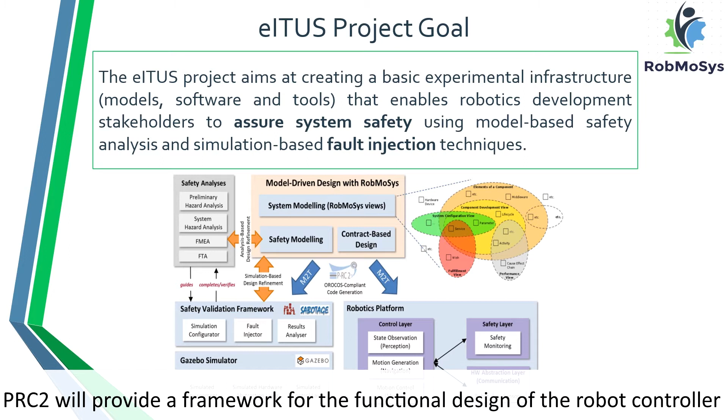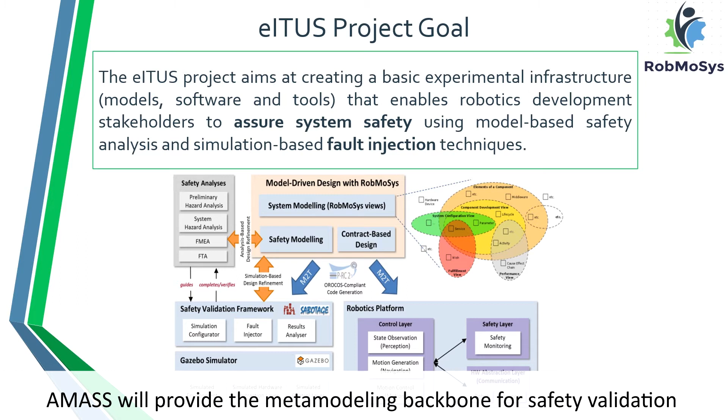PRC2 will provide a framework for the functional design of the robot controller with component development and system configuration views. It will additionally provide tools for code generation from these views. AMASS will provide the meta-modeling backbone for safety validation by providing a safety modeling view for both model-based safety analyses and simulation-based fault injection. Two remarkable challenges exist when developing reusable safe robotics systems and software.

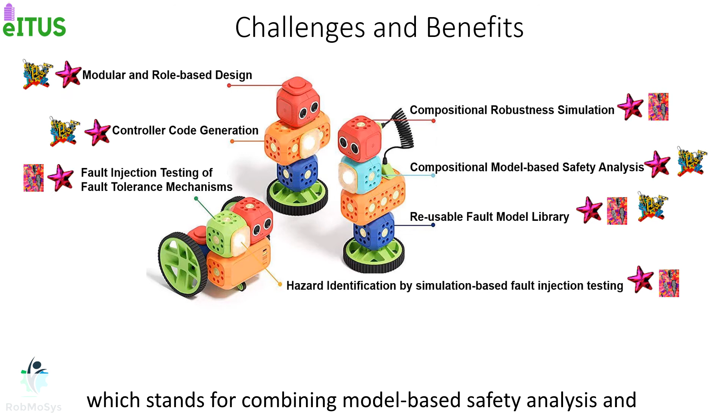First, modular and role-based design needs to be provided. Second, solutions for an early safety assessment are needed, which stands for combining model-based safety analysis and robustness simulation by means of fault injection. Some of the most attractive benefits of applying the eITUS methodology are the development of composable, replaceable and reusable safe components.

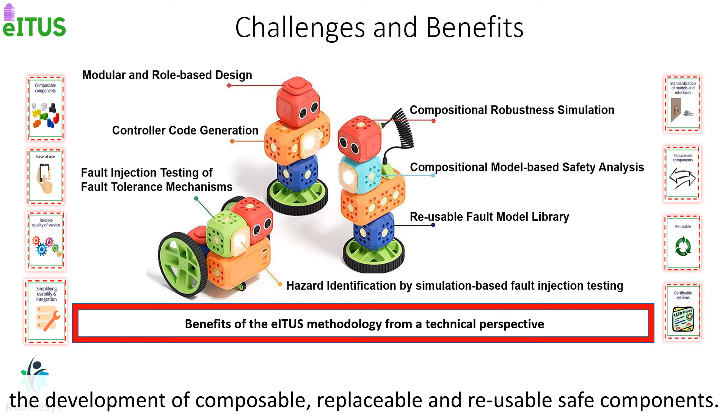Robotics systems face hazards whose sources belong to software, electronic, electric or mechanical parts of the system itself, as well as to human errors, or to an uncertain and stressful environment. Functional safety is the aspect of safety that aims to avoid unacceptable risks due to electric malfunctions. The system should be designed to properly handle likely human errors, hardware and software failures and operational, environmental stress.

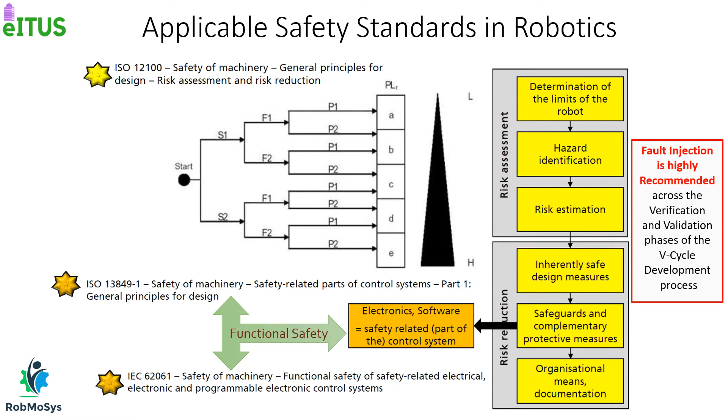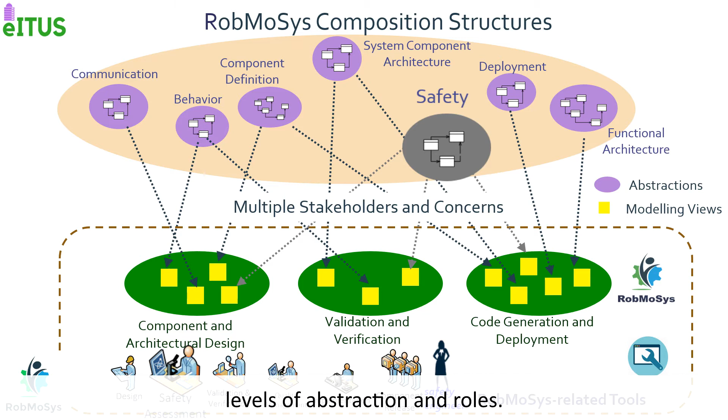The RobMoSys project defines structures which enable the management of the interfaces between different robotics-related domains, levels of abstraction and roles. eITUS will broaden the ecosystem by considering safety aspects such as the development of a safety view and the introduction of a new role called safety engineer.

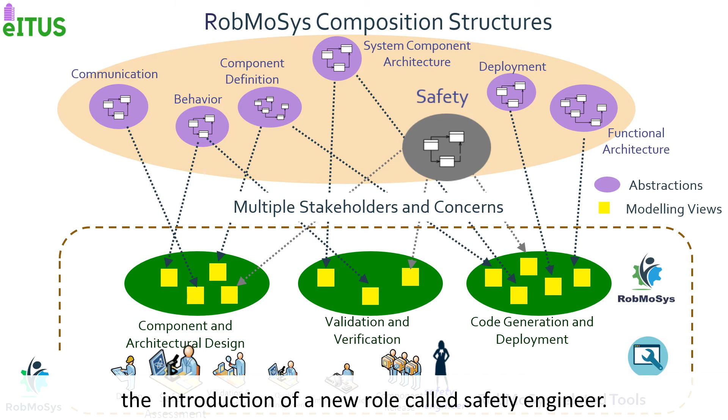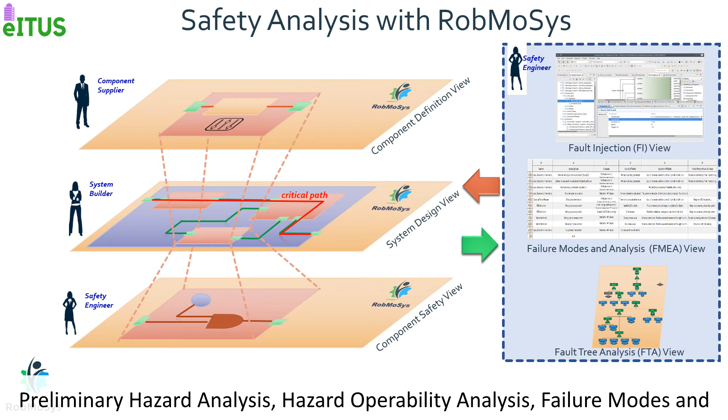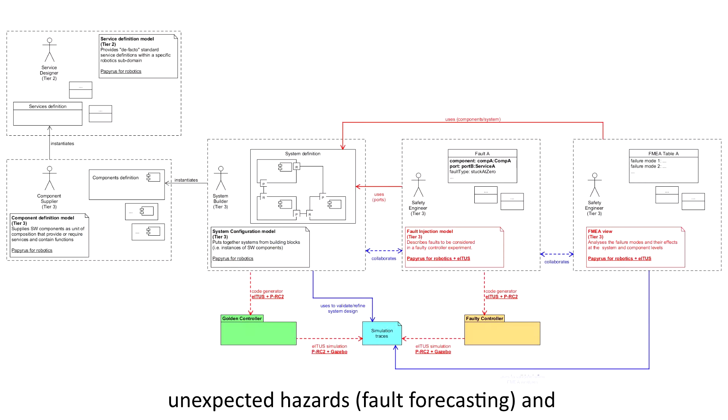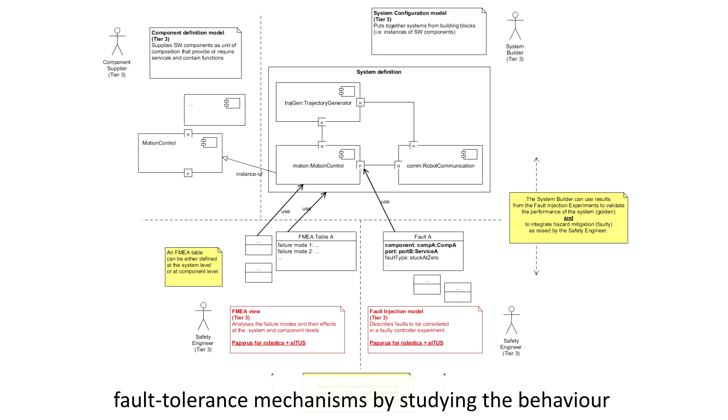The safety analysis and validation steps are fundamental aspects to perform the safety assessment. Some of the commonly used risk assessment methods are preliminary hazard analysis, hazard operability analysis, failure modes and effects analysis and fault tree analysis. Furthermore, fault injection simulations complete these analyses by finding unexpected hazards, fault forecasting, and verifying the implemented safety mechanisms. Fault injection is a common technique for validating the effectiveness of fault tolerance mechanisms by studying the behavior of the system in presence of faults.

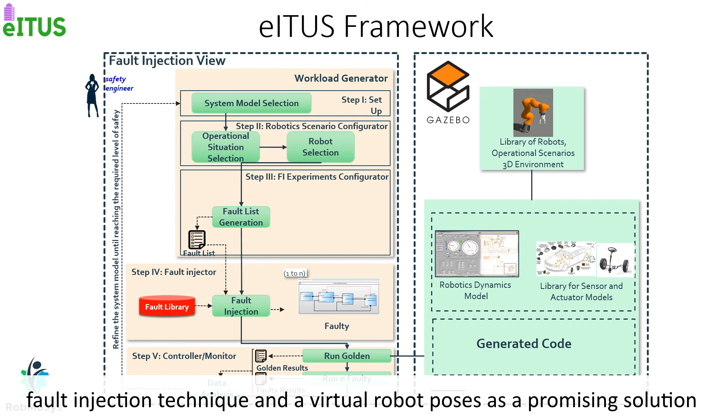The effects of software or hardware faults are emulated by randomly changing code or data at different software locations. The eITUS framework sets up, configures, executes and analyzes the simulation results. Model-based design combined with a simulation-based fault injection technique and a virtual robot poses as a promising solution for an early safety assessment of robotics systems.

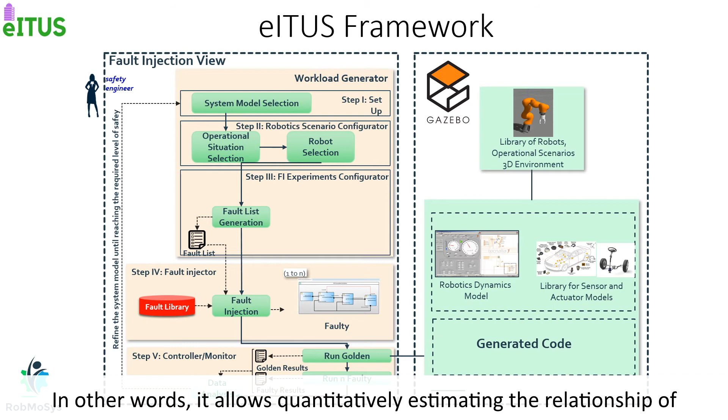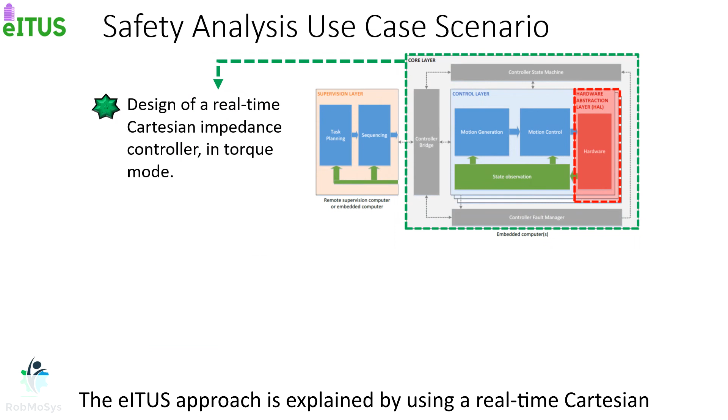The added value of including robots and environment models is that the maximum time before the robot dynamics are unsafely affected can be identified. In other words, it allows quantitatively estimating the relationship of an individual failure to the degree of misbehavior on robot level. The eITUS approach is explained by using a real-time Cartesian impedance control system, in torque mode as a use case scenario. The eITUS overall approach is as follows.

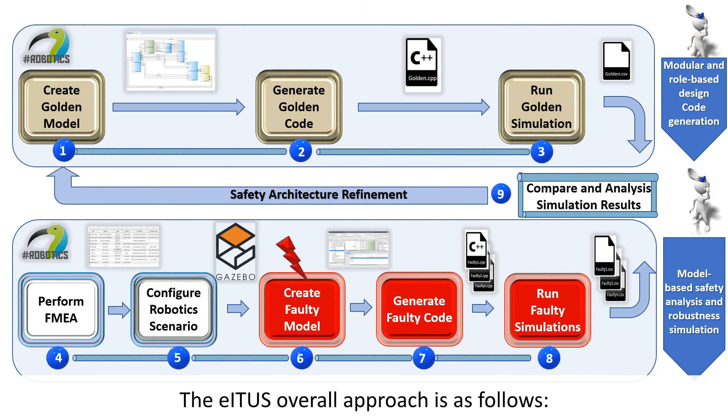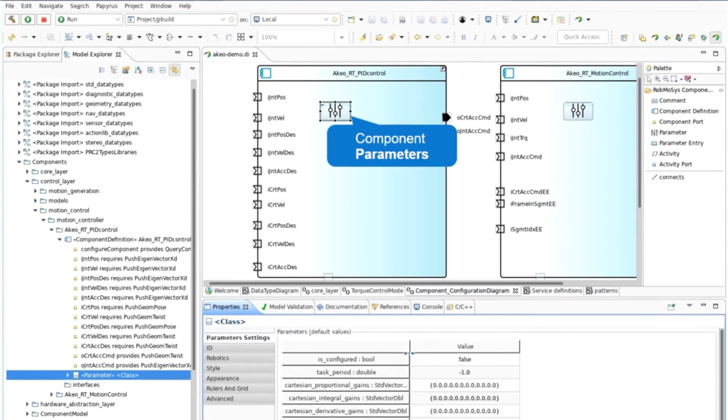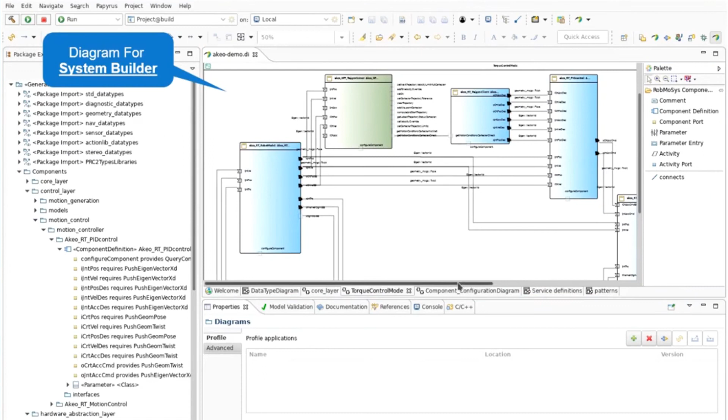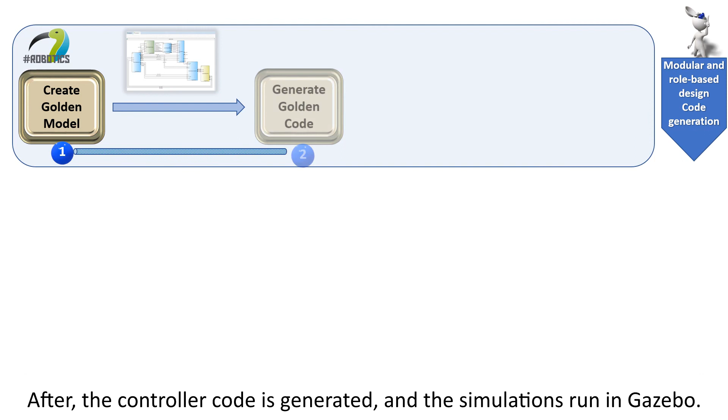Before starting the fault injection experiments, the golden system model, which represents a model without any faults in place, and its corresponding simulations must be created. A component supplier manages the design and configuration of components and their parameters. A system builder designs the global architecture by assembling components and adjusting settings. After, the controller code is generated, and the simulations run in Gazebo.

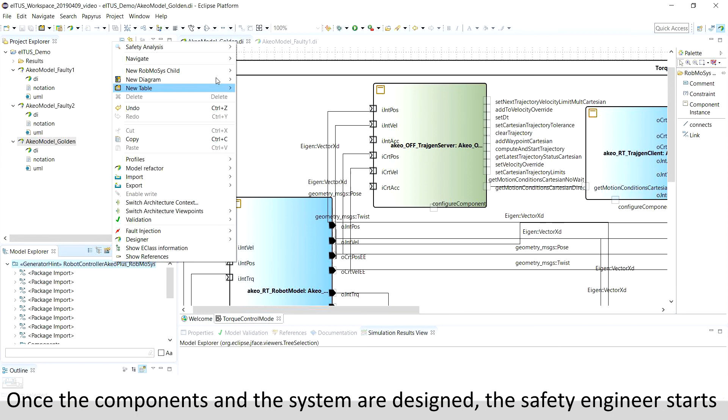Once the components and the system are designed, the safety engineer starts the FMEA process, which can be performed in a compositional way. First, FMEAs are carried out at component level. Then, the FMEA is developed at system level and the safety requirements are defined. The failure modes set during this process will be represented as fault models in the configuration of the faulty system.

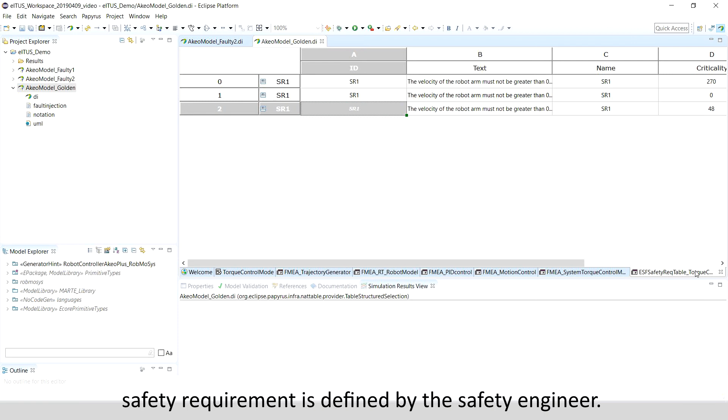In order to prevent a failure mode, a preventive action or safety requirement is defined by the safety engineer. These safety requirements will be the basis for the pass-fail criteria of the fault injection experiments.

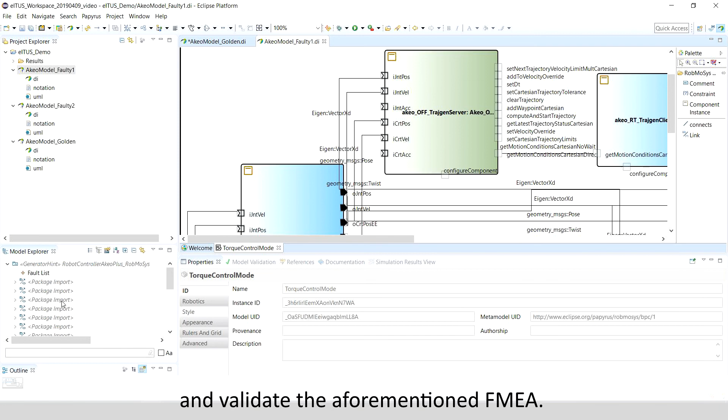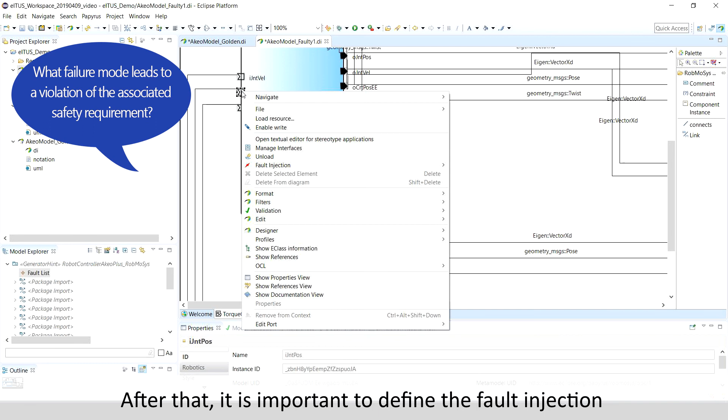After performing the traditional model-based safety analysis, fault injection experiments can be specifically set up to refine and validate the aforementioned FMEA. The safety engineer starts by selecting the system model and the robotics scenario, which includes the operational situation and the robot. After that, it is important to define the fault injection policy, which is referred to as the fault list.

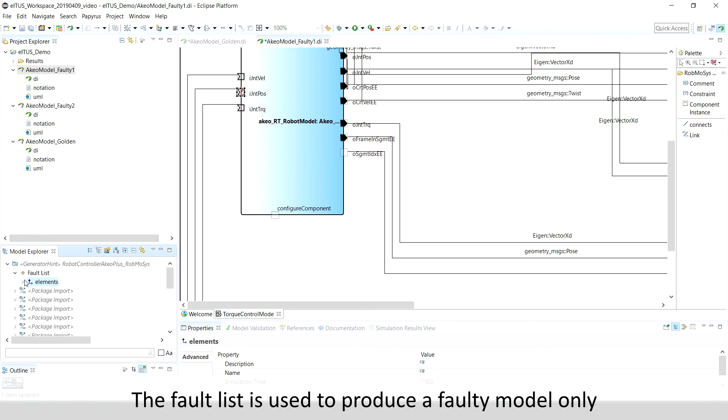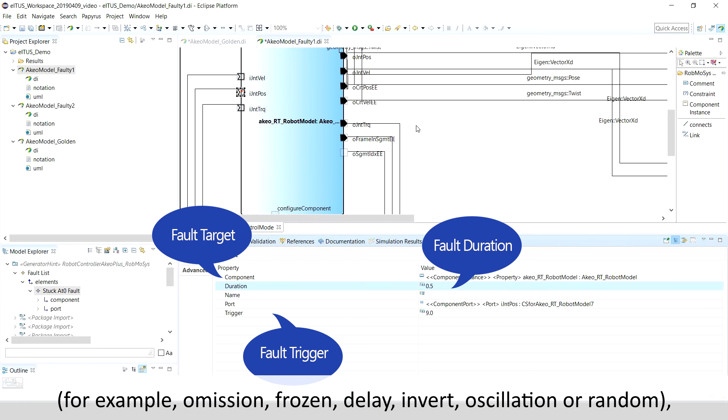The fault list is used to produce a faulty model only in terms of reproducible and prearranged fault models. Fault models are characterized by a type, for example, omission, frozen, delay, invert, oscillation or random, target location, injection triggering, time-driven, and duration.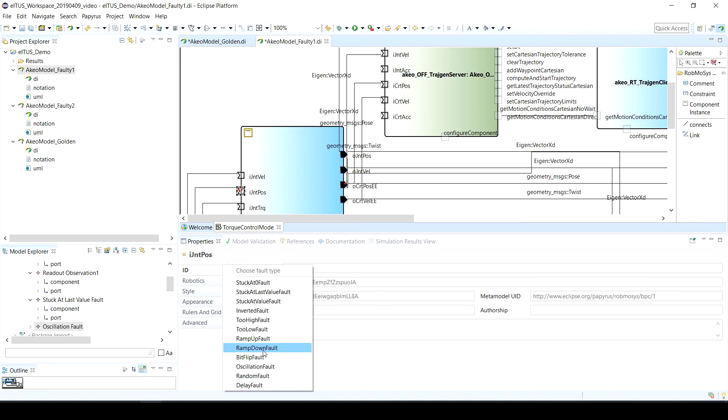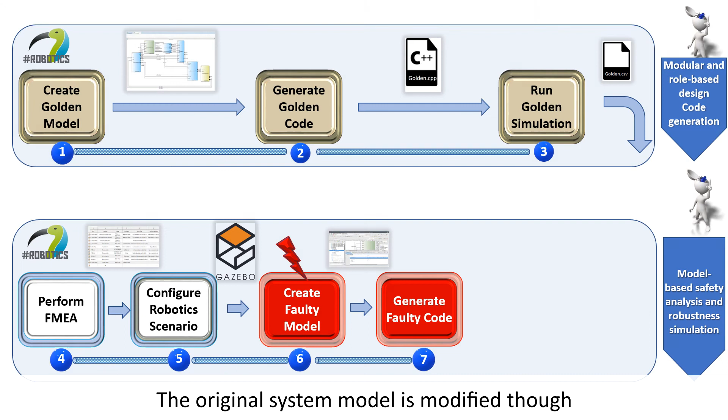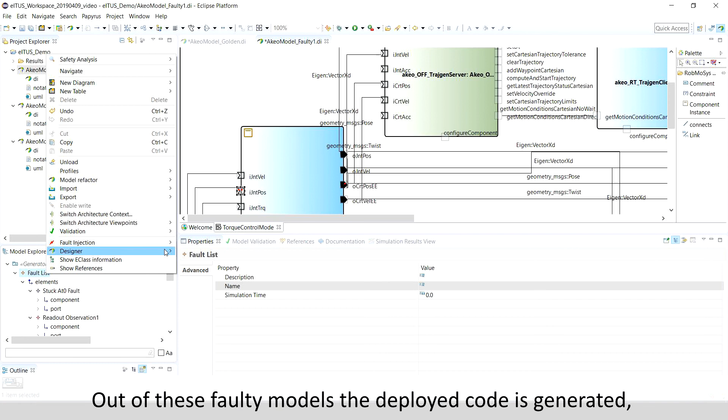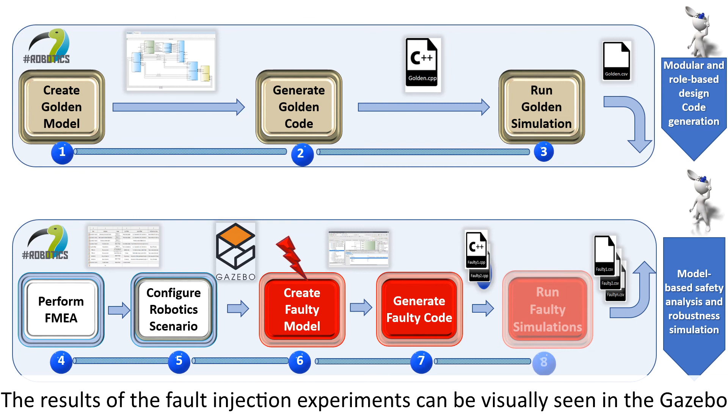The original system model is modified through the fault injector script according to the fault list. Out of these faulty models the deployed code is generated, and the simulations are run. The results of the fault injection experiments can be visually seen in the Gazebo simulation environment or in the fault injection simulation results view.

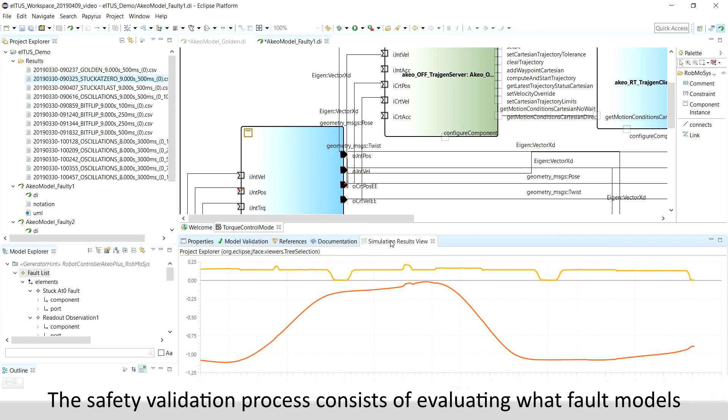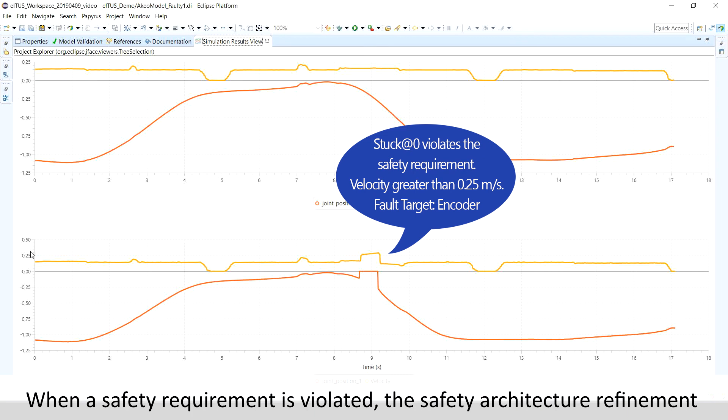The safety engineer analyzes the resulting simulation traces in the simulation results view, which illustrates the main comparison between golden and faulty signals. This safety validation process consists of evaluating what fault models violate the established safety requirement. In other words, the pass-fail criteria are established upon the predefined safety requirements. When a safety requirement is violated, the safety architecture refinement process is accomplished and the necessary safety mechanisms included.